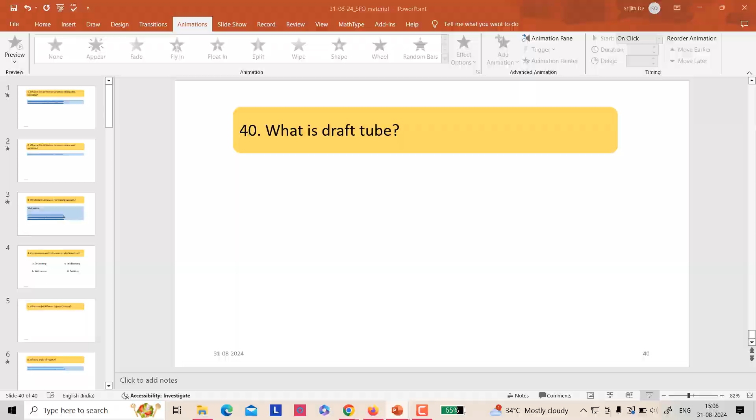So the first question is, what is the difference between mixing and blending? Mixing and blending are almost same. They are used interchangeably.

Mixing is a process that tends to result in randomization of dissimilar particles. It mixes different size of dissimilar particles.

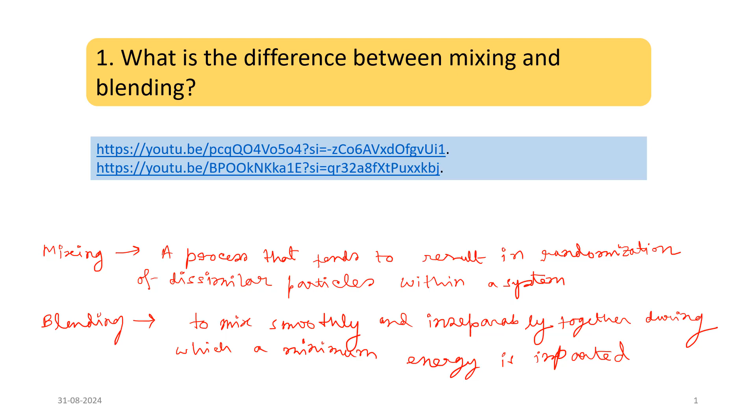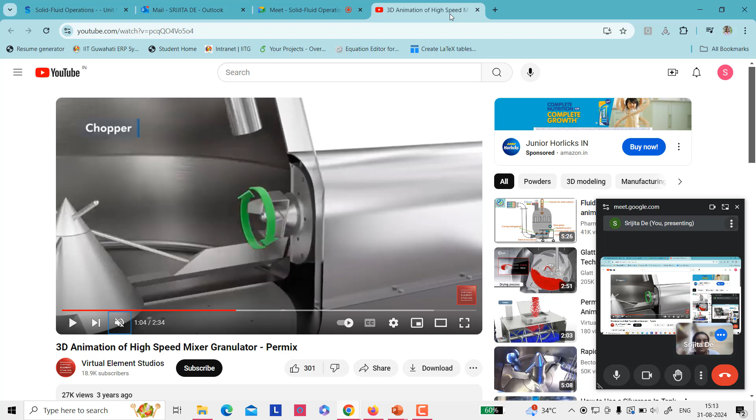I hope my screen is visible. So you can see here the solid feed - different types of two solids are fed, and they are mixed. This is also mixing or blending - this is a mixing between two solids.

Second, what is the difference between mixing and agitation? Now we have learned that mixing and blending are same, but mixing and agitation are not same. So what is agitation?

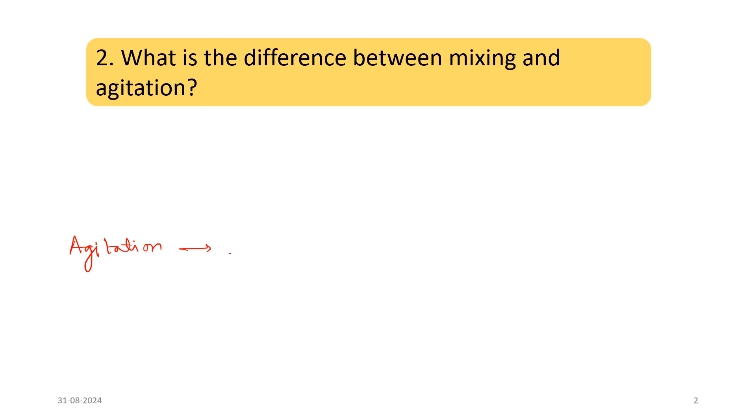It refers to the induced motion of a material in a specific pattern. So in case of agitation, particles or fluids are mixed in a specific pattern. But in case of mixing, it is rather a random distribution.

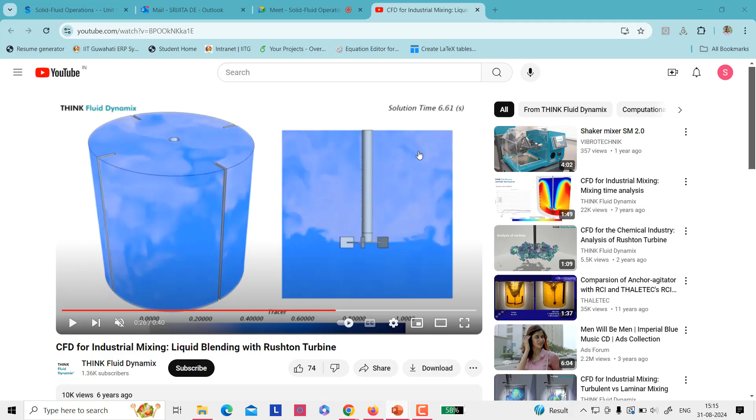So feed is given inside the chamber, and now you can see the induced motion is created through these blades of the stirrer. That is why some kind of external force is there to create the mixing - that is why it is called agitation. It is also one type of mixing. So different types of samples are coming and it is agitated.

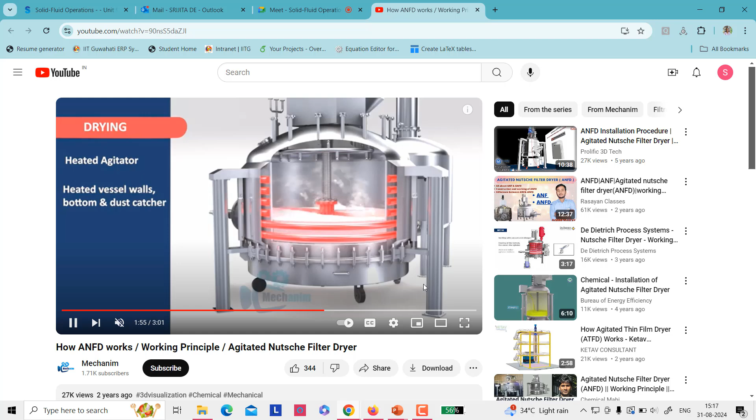So in drying also agitator can be used. In washing also agitator can be used. In cooling also you can see agitator can be used.

Now, which method is used for making capsules? Which mixing method is used to make capsules? The answer is wet mixing.

The answer is wet mixing. Wet mixing is generally considered in the granulation step in the production of tablets and capsules. So there are different types of mixing - one is wet mixing, second one is dry mixing, and third one is dry blending. All are almost same.

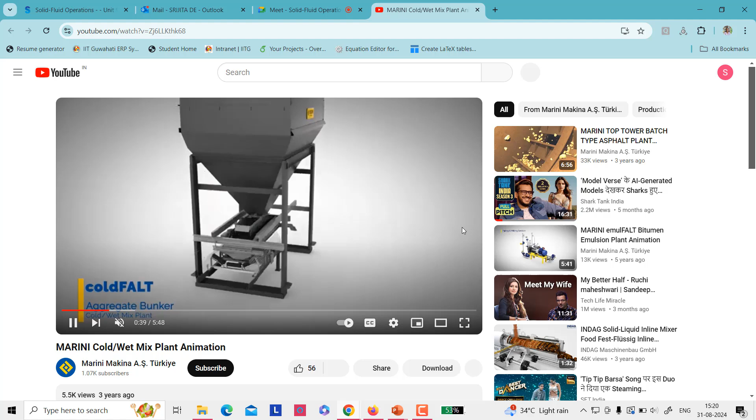So we'll see the videos. You can see the wet mixing plant.

These are the vibrators, removable bunker body extensions for transportation in container. So these are different parts - feeding bunker, from here feed will happen. This is how you see - these are the nozzles, spraying nozzles from where cold or wet water will be coming.

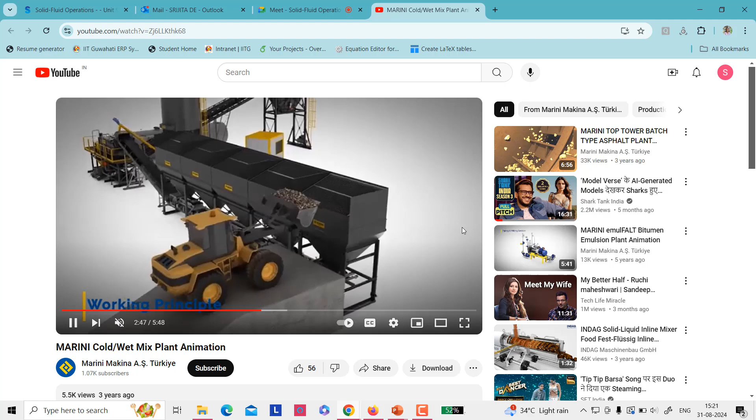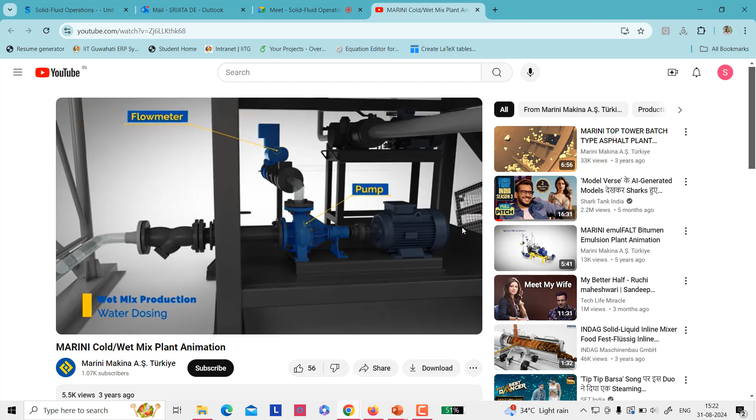Now see, different types of particles are going. Now water dosing will happen. There is a pump which controls the water pressure. Now see, water dosing is happening.

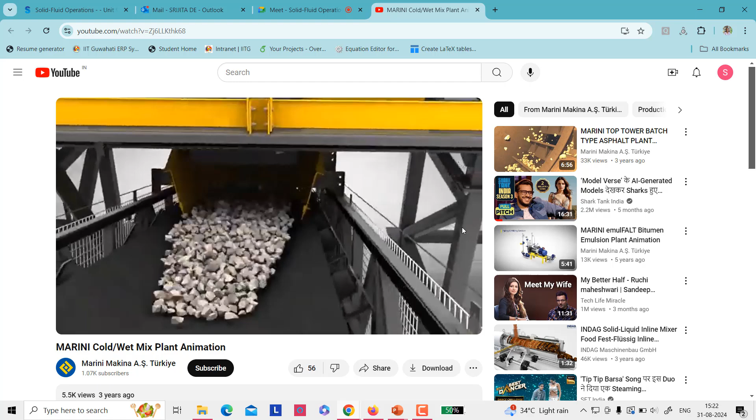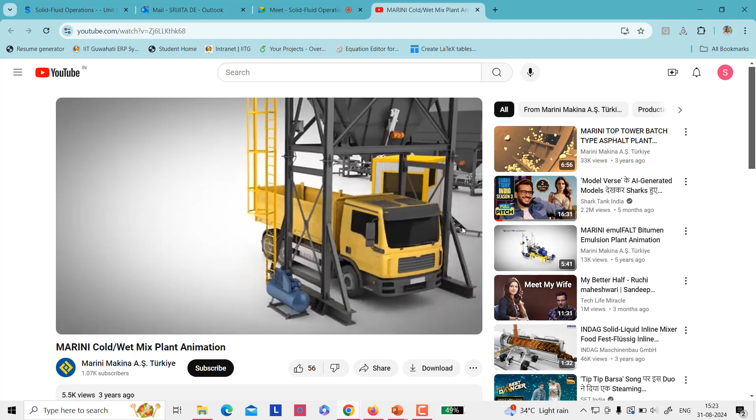Next one is the dry mixer.

This is the different parts of the system. This is the fine particles. Mixing is happening. So this is the dry particles are mixed.

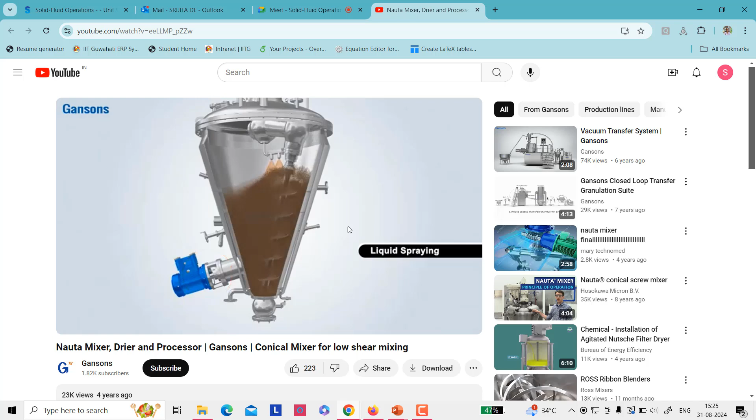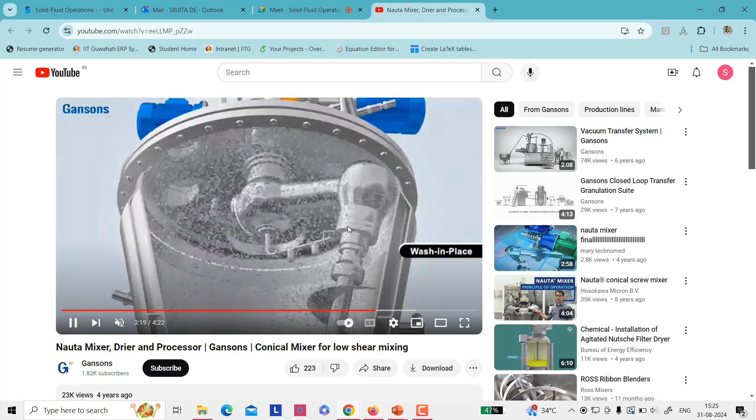Now heating is happening. Now from the bottom, discharge is there, right? So this is the dry mixer. Now we'll see the dry blender.

Next, compression method is used in which method? So the answer is dry mixing.

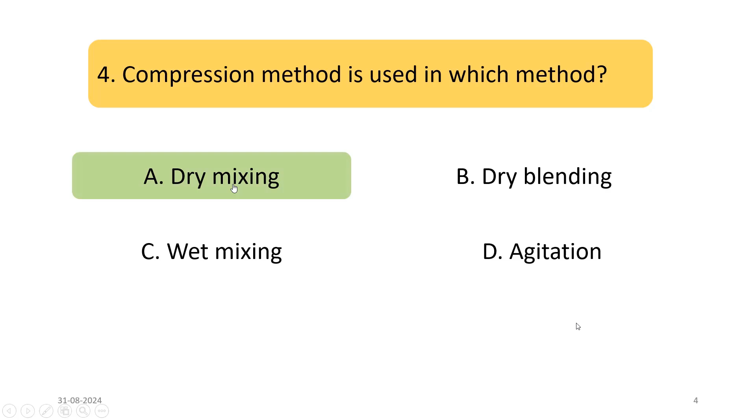What are the different types of mixing? First one is the convective mixing. Second one is the diffusion mixing. And the third one is the shear mixing.

Convective mixing means the groups of particles are moved from one position with a pattern, mixing two or more groups of solid particles so that they are dispersed in each other.

Diffusion mixing means the particles are distributed over a freshly developed interface. The powdered materials are mixed in a container where the movement of the powdered particles occurs by tilting the material beyond the angle of repose.

And shear mixing is the momentum exchange of powder particles having different velocities leads to shear mixing. So shear mixing is happening due to the shear stress or shear force. Diffusion mixing is more among the powdered materials, and convective mixing is for the larger particles.

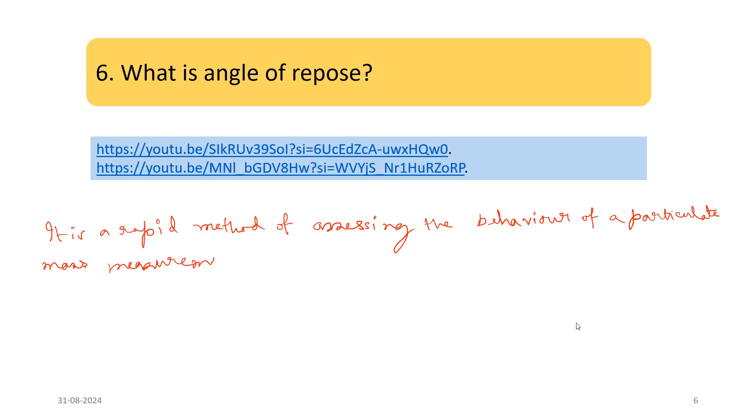Now, if solid is poured from a nozzle onto a plane surface, it will form an approximately conical heap, and the angle between the sloping side of the cone and the horizontal is the angle of repose.

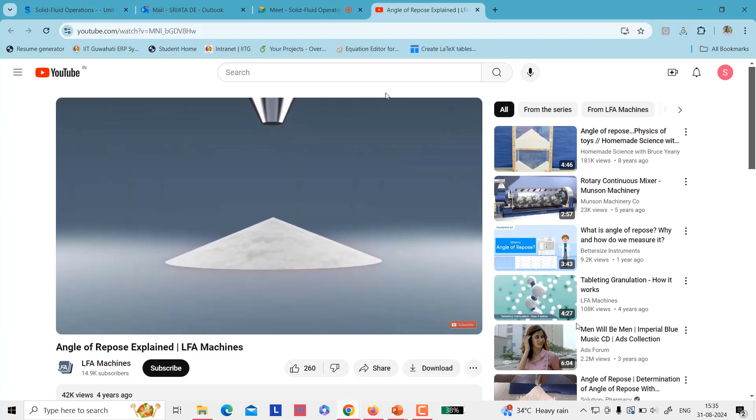Initially, when very less amount of powder is there, it is just 0°. And now we are increasing the amount, and now it is showing the 48° angle of repose. Now, if we again increase, it will increase the angle from 48 to 90. The previous one was irregular shape, this is the regular shape, and this is the different kind of heap they are creating with this tester.

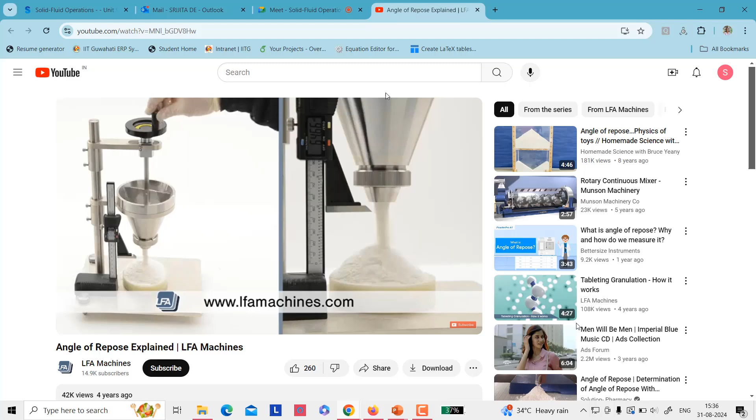So this is just showing the tester.

Next question. Gravity in bed mixing device is an example of active mixer. Is it true or false? Gravity in bed mixing device is an example of active mixer.

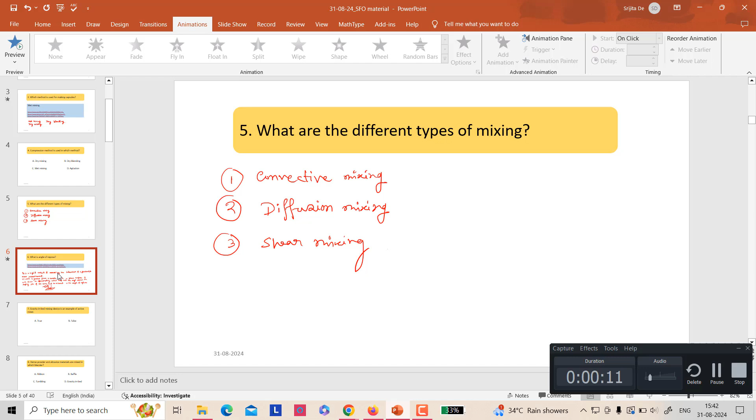Now, gravity in bed mixing - is it an example of active mixer or not? The answer is false. So gravity in bed is a passive mixer.

Passive mixer. So what is passive mixer? In this system, randomization of the materials is achieved by directed flow of the powder streams by baffles, etc.

And another mixer is active mixers. The active mixers use certain moving parts to assist in the randomization of the solid materials, or the mixer machine moves about physically in this mixing process. So in case of active mixing, the direct involvement of the material or direct involvement of the machine is required.

Next question. Dense powder and abrasive materials are mixed in which blender? The answer is tumbling type of blenders, where dense powder and abrasive materials are mixed.

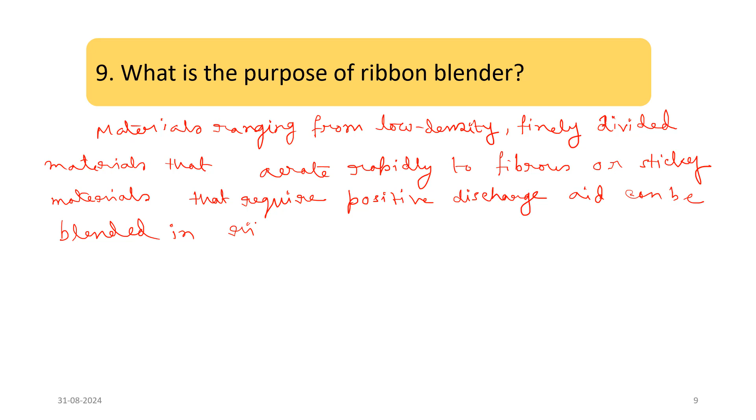Can be blended in ribbon blender. A broad ribbon can be used for lifting as well as for conveying, while a narrow one will cut through the material while conveying. So these are the purpose of using ribbon blender.

Next question. What is the name of the blender that uses a conical vessel and reduced power consumption?

What is the name of the blender that uses a conical vessel and reduced power consumption? The answer is vertical orbiting screw blender. It is a batch type blender consisting of a conical vessel with a rotating screw which lifts powder from the base of the vessel to the powder surface, while at the same time orbiting around the vessel. An advantage of this design is that mixing is rapid, and the power consumption to produce a uniform blend is considerably reduced.

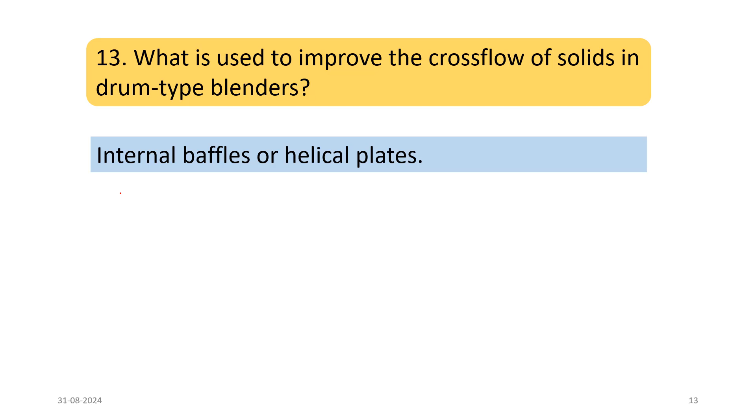Next question: talk about the different types of blenders. So till now we have learned there are so many blenders, right? Batch type blenders, continuous type blenders. So we'll see the videos one by one.

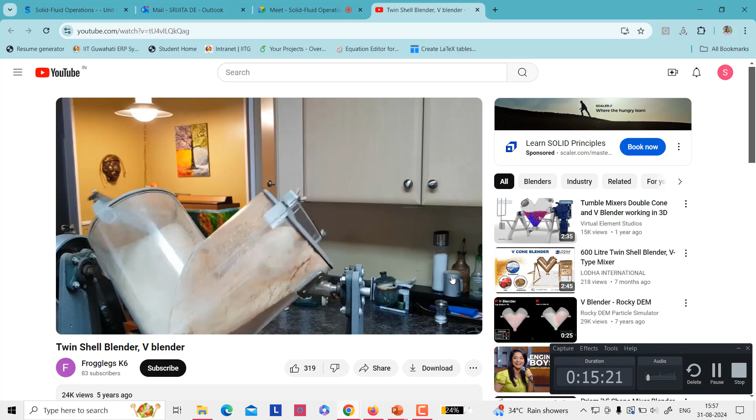First one is the twin shell blender, or V-type blender, also called the tumbling blender. You can see how they are mixing, right? So again, if you see this, this is the mixing type.

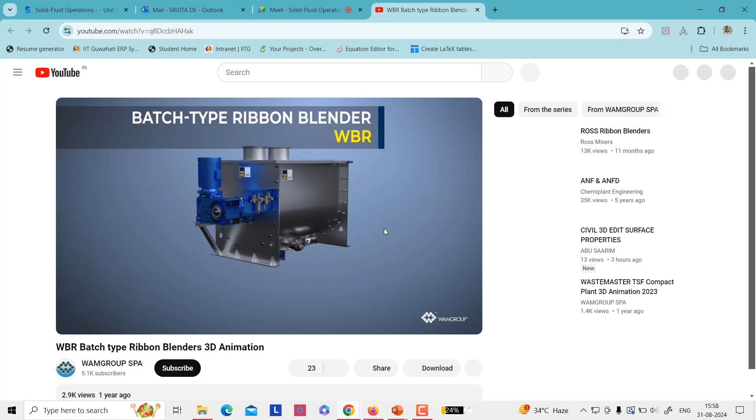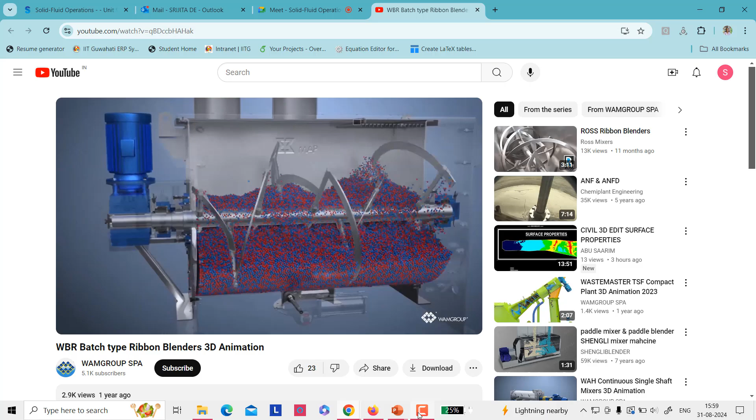So now we will see this is the ribbon blender. Two types of fluids, solid particles, are coming and they are mixed with this blend.

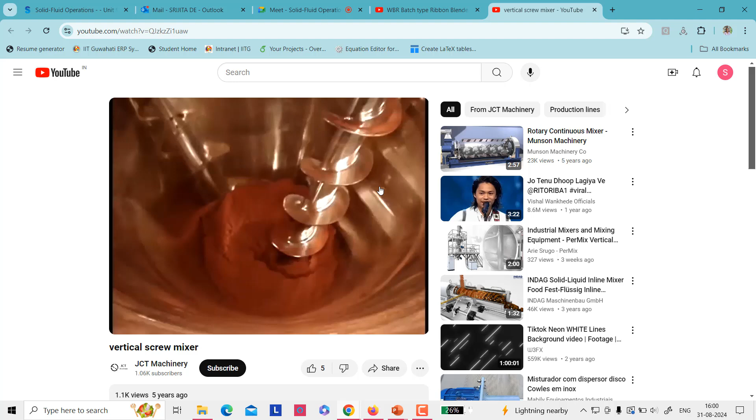Next is the vertical screw mixer. So this is a real example. You see that two screw type blenders are mixing in a vertical surface.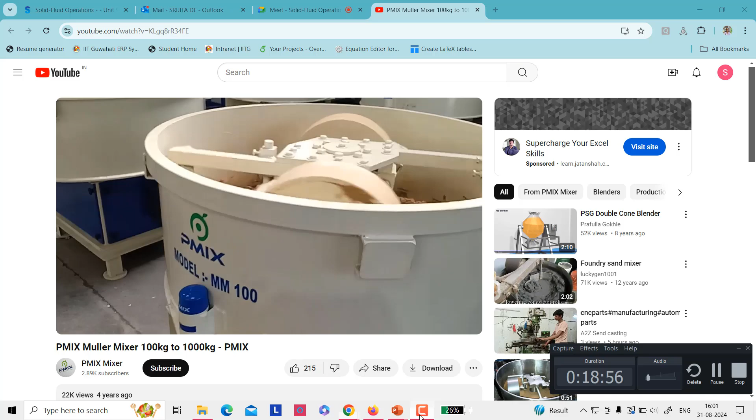Next is the Muller mixer, continuous Muller mixer. You can see, it is written that the wheels compress materials against the pan bottom while the scrapers move the material from the pan sides and center to flow under the wheels. This is the typical Muller mixer.

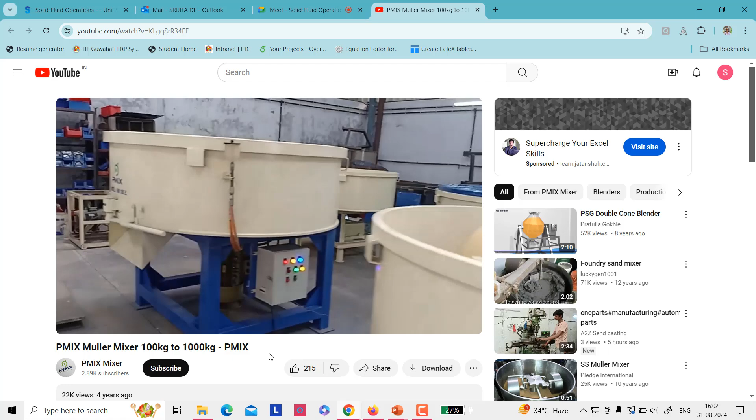So that is how they are separated. Next one is the single rotor blender, single shaft rotor blender.

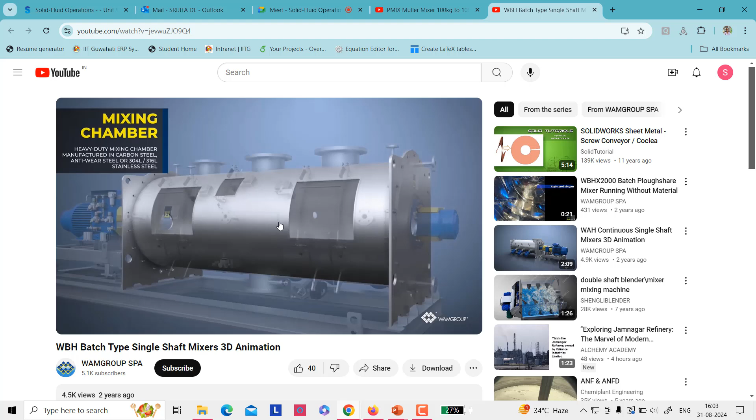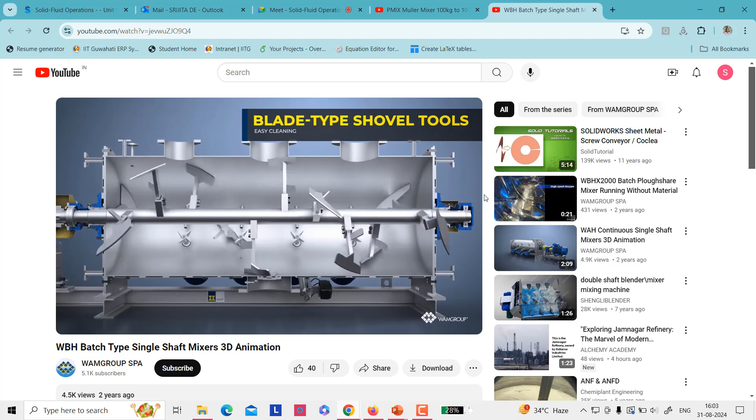They are mixing using different types of blades. You can see, right? Standard tooth edged blade type, tooth blade, shovel tools are used for mixing. So different types of blades are used. You can see how they are mixed - this is the single shaft rotor blender.

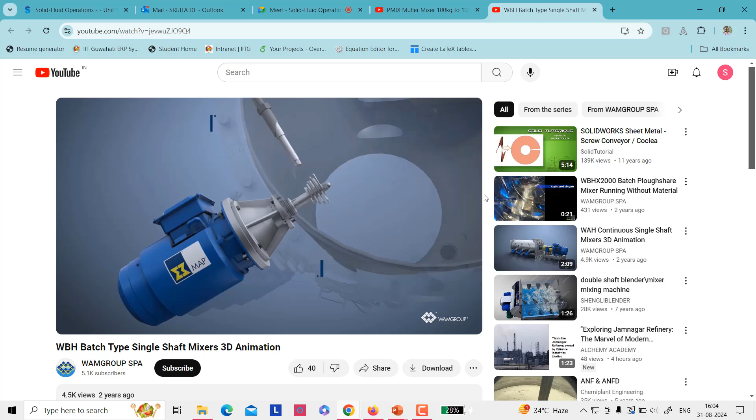Next one is the continuous mixer. Till now we have learnt about the batch mixer, now is the continuous mixer. You can see in the continuous process, feeds are coming, they are mixed, two different types of feeds are coming, they are mixed along the way and they are separated. This is continuous mixing.

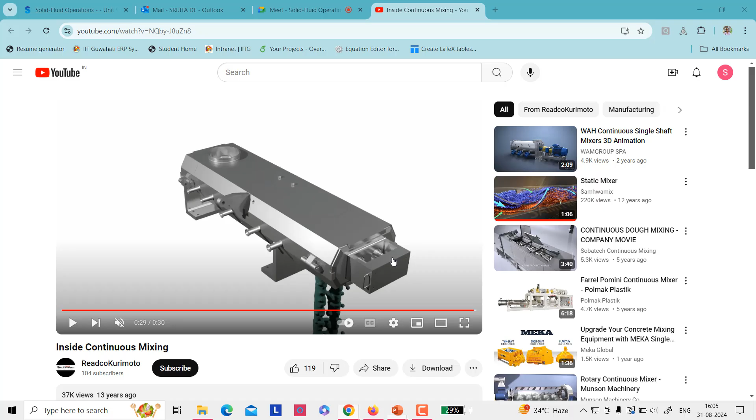Next one is about the pug mill. The pug mill consists of a drum or trough-shaped vessel equipped with a double-shafted or, less often, single-shafted agitator. The paddles are usually adjustable, you can see the paddles here, so that their forward and backward motion can be varied during mixing. So this is a pug mill.

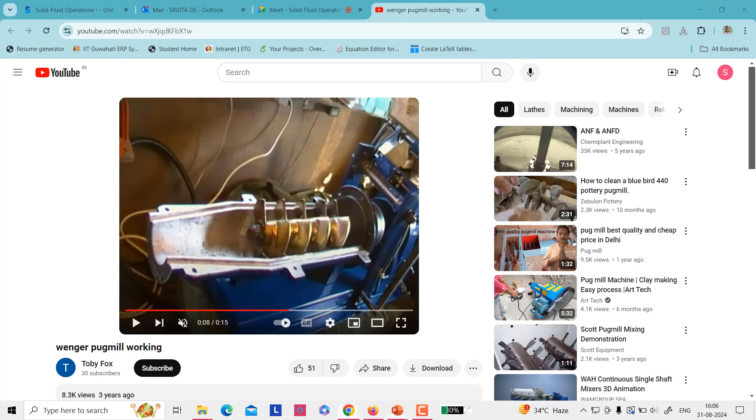Next is the static mixer. You can see that flow is coming, and without any movement, due to the baffle, the fluid is mixed. So static mixing is also called the motionless mixer, which consists of a cylindrical chamber containing a chaos inducing element. Here the chaos inducing element is this baffle, which helps in mixing of the liquids.

Next is the zigzag rotor. So this is the zigzag rotor.

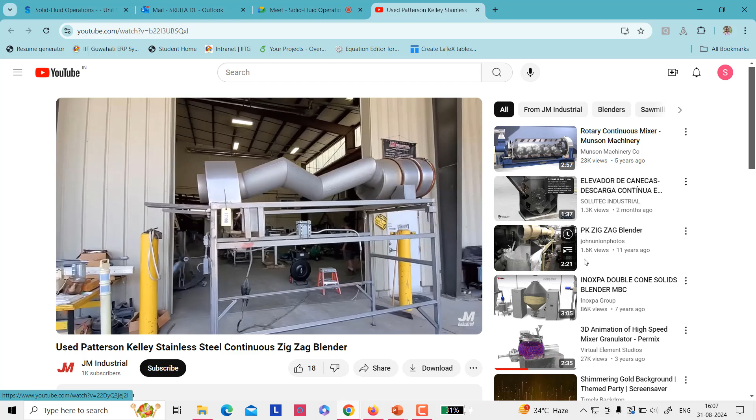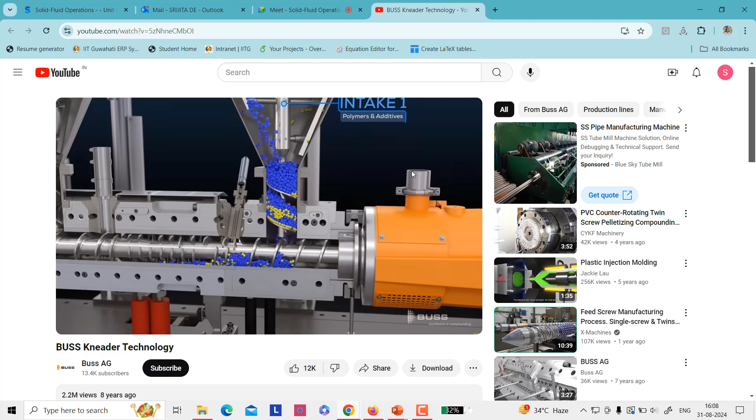Last one is the kneader. So this is the mechanic part. You can see how the shaft is also moving and having an oscillating motion, right?

This is the melting zone and particles are mixed. Some fillers are mixed here. So you can see how it is a continuous process. Along the way, everything is happening from the coming feed to mixing and processing, and finally the outlet.

So this is the kneader. This is the whole kneading technology or kneader technology.

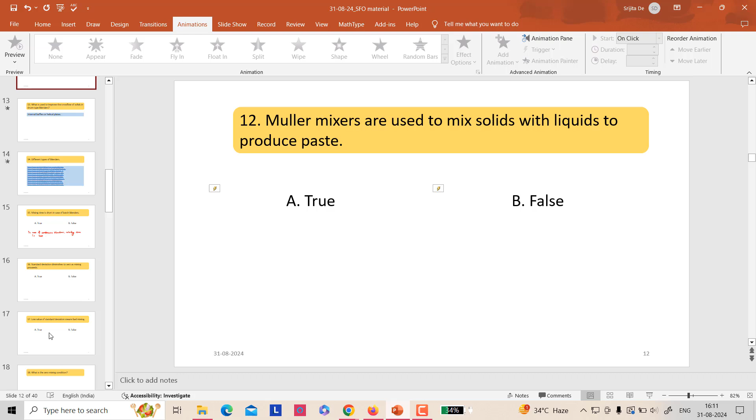Next, standard deviation diminishes to zero as mixing proceeds. Is it true or false? The expression of standard deviation, you know, right? S is root under summation of xi minus x bar whole square, where i is 1 to n, divided by n minus 1. So n is the total number of samples, xi is the volume fraction of each of the tracer, and x bar is the average volume percentage. Now the answer is true. As mixing proceeds, all kinds of particles are distributed in almost similar size or average size. All kinds of particles achieve almost an average size, so standard deviation becomes 0.

Next, low value of standard deviation means bad mixing. Is it true or false? It is false. Because, as we just saw, if the standard deviation value is diminishing, that means it has created an almost homogenized mixture. So low value of standard deviation means good mixing. That is why it is false. It will lead to good mixing.

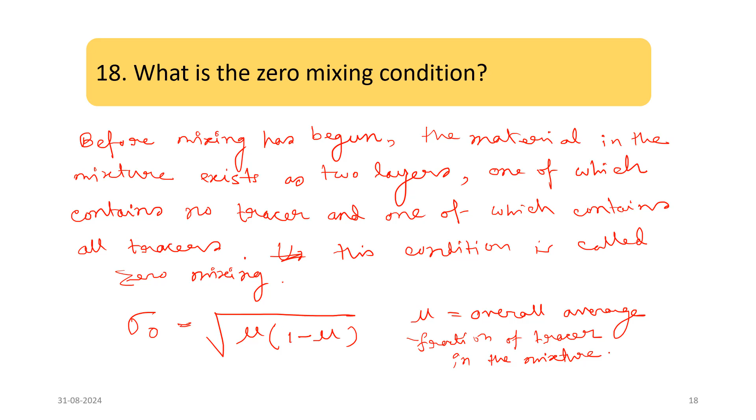Next, in batch mixing, what is the value of mixing index at the start? The answer is unity. Mixing index is unity in case of batch mixing at the initial condition.

Next, higher the value of mixing index, higher the value of what? Fill in the blanks. So what is mixing index? Mixing index is defined as Is equals sigma 0 by S. Now if we write the expression, it will be n minus 1, mu into 1 minus mu, divided by summation of xi minus x bar whole square, i equals 1 to n. So this is the mixing index, right? Mixing index is high means the mixing is also high. The quality of mixing is also high.

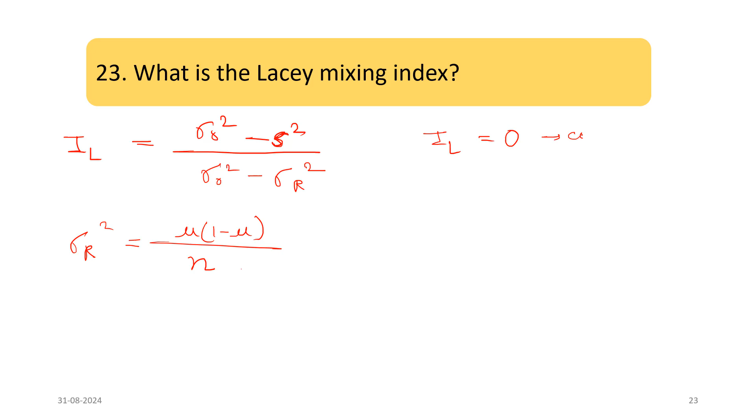Lacey mixing index, IL is 0, would represent complete segregation. That means particles are separated, not started mixing. And a value of unity, IL is 1, means completely random mixture. Practical values of Lacey mixing index lie between 0.75 to 1. This is the expression of Lacey mixing index.

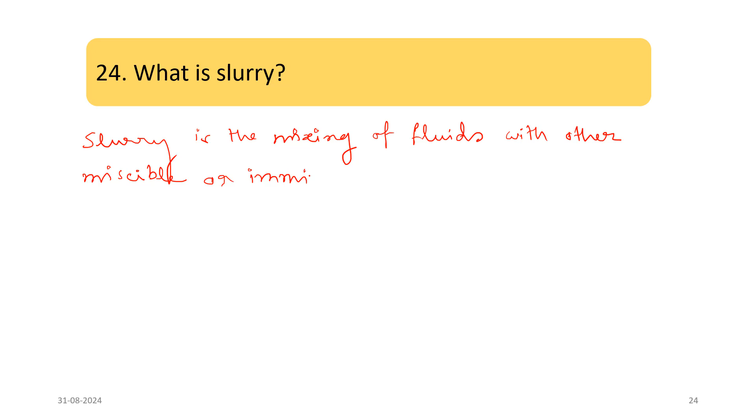Next, what is slurry? Slurry is the mixing of fluids with other miscible or immiscible liquids, gas, and with fine particles.

So this is the slurry. This is a mixture of all the things.

Next question: different methods of slurry mixing. Talk about the different methods of slurry mixing.

First one is the turbulent mixing. It is the highly effective mixing due to turbulent flow, which results in random fluctuation of the fluid velocity at any given point within the system. Fluid velocity at a given point changes in three directions, that is x, y, z.

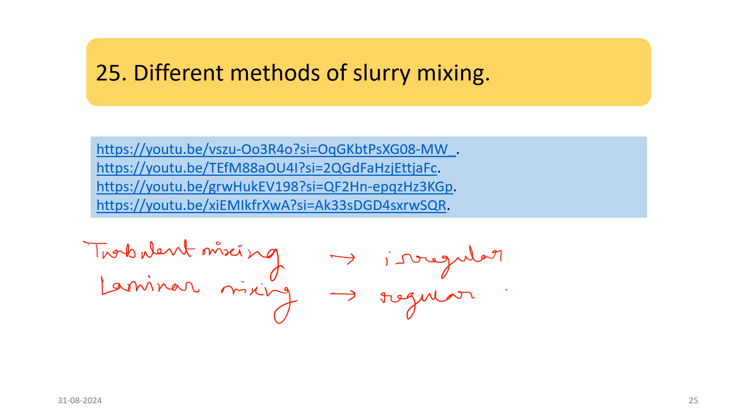Second one is the laminar mixing. So turbulent one is the irregular mixing, laminar one is the regular mixing. Here two dissimilar liquids through laminar flow, applied shear stretches the interface between them, suitable for liquids which require moderate mixing.

And the last one is the molecular diffusion. It is the mixing at the molecular level. So we'll see the videos and it will be much more clear.

So this is the turbulent mixing. You can see how vigorously it is mixing and it doesn't have any particular direction of mixing. It can mix in any direction, X, Y, Z direction. So that is called chaotic, vigorous, turbulent mixing, right?

Next one is this - the laminar mixing. So mixing is happening layer by layer due to the presence of shear stress. You see how smoothly this is mixing. There is no vigorous, irregular patterns.

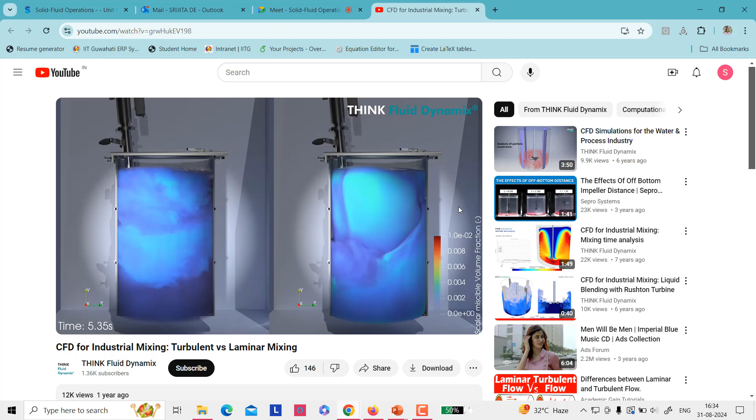Next one is the comparison between turbulent and laminar mixing. This is the turbulent regime, this is the laminar regime. You can clearly see the difference, how vigorously the turbulent one is mixing and how layer by layer with a particular pattern the laminar mixing is happening.

Next one is the molecular diffusion. It is happening at the molecular level in which molecules diffuse due to the thermal motion. So due to the thermal motion, it is creating this mixture at the molecular level, right?

Next question: in agitator, the fluid's depth is controlled approximately equal to the diameter of the vessel. Is it true or false? The answer is true. In agitator, the depth of the fluids and the diameter of the vessel is kept the same.

Next, what are the different types of impellers? The impellers are used to create flow patterns, right? So what are their types?

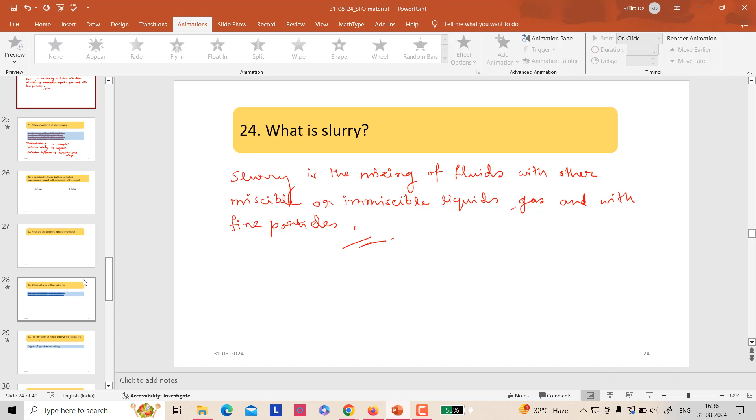So what are the different types of impellers? There are three types: propellers, turbines, and paddles.

Under this division there are also subdivisions like three blade turbine mixer, open straight blade turbine mixer, next bladed disc turbine - this is the most common of the turbines part - vertical curved blade turbine, and the last one is the pitched blade turbine.

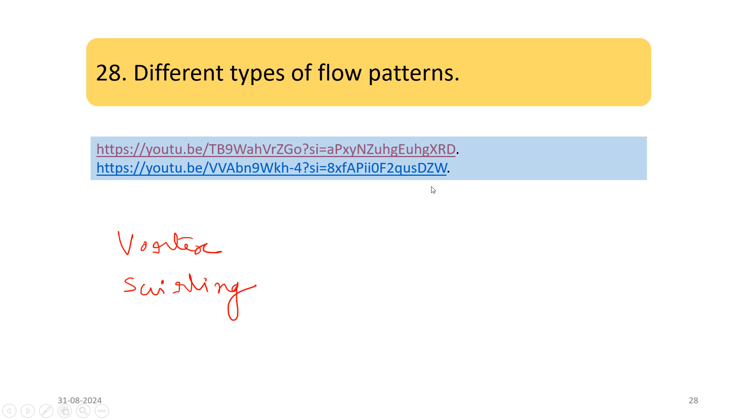So this is the swirling one. Swirling perpetuates stratification at the various levels without accomplishing longitudinal flow between levels. Swirling pattern develops if a low viscous fluid is stirred in an unbaffled vessel by a centrally mounted impeller. So this is swirling.

Next, the formation of vortex and swirling reduce the... fill in the blanks. The formation of vortex and swirling reduce the degree of agitation and mixing.

Next, in which type of fluid is propeller used? The viscosity of the liquid should be less than 50 poise. If the fluid viscosity is more than 50 poise, propellers cannot be used, like in case of castor oil or glycerol.

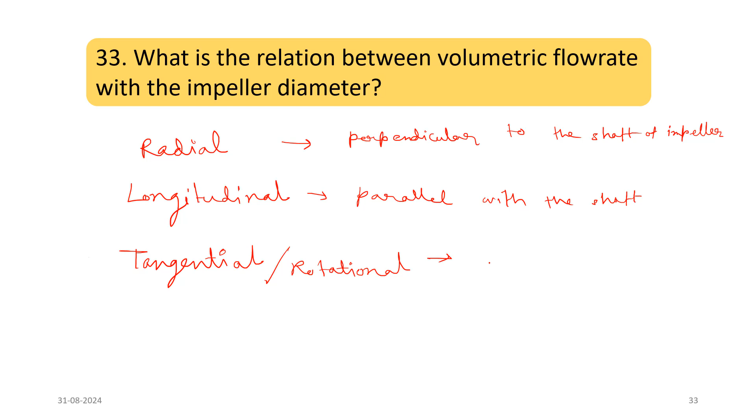So radial velocity component acts in the direction perpendicular to the shaft of the impeller. Longitudinal acts in the parallel direction, parallel with the shaft. And tangential or rotational acts in the direction of tangent to a circular path around the shaft.

Okay, next. So this is it, next.

What is the relation between volumetric flow rate with the impeller diameter? What is the relation between volumetric flow rate with the impeller diameter?

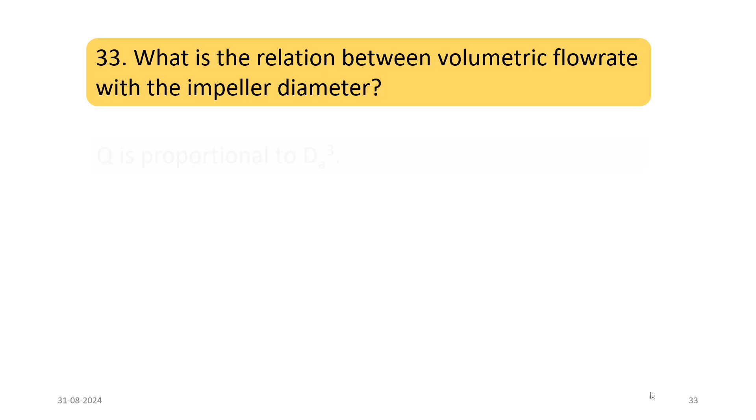So volumetric flow rate is proportional to the impeller diameter cube, right? So this is the expression. NQ is the flow number, N is the rotation of the impeller, and dA is the impeller diameter.

Next, flow number is constant for all type of impellers. Is it true or false? The answer is false - for different impellers, flow number is constant. No, I think flow number is constant for all type of impellers is true.

Yes, this is true, my mistake. So flow number is constant for all types of impellers - that is true. Next, what is the value of flow number in marine propellers?

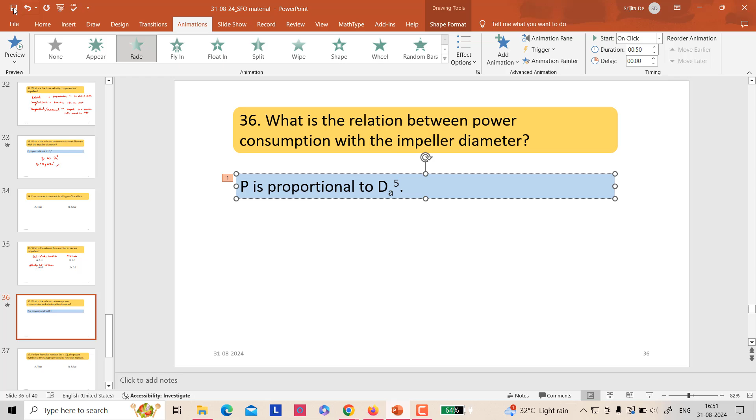Next, what is the relation between power consumption and impeller diameter? The answer is P - power consumption is proportional to diameter to the power 5. That is P equals NP rho N cube dA to the power 5, where NP is the power number, rho is the density of the fluid, N is the rotation speed, and dA is the impeller diameter. Next, for low Reynolds number,

the power number is inversely proportional to Reynolds number - is it true or false? For low Reynolds number, the power number is inversely proportional to Reynolds number, is it true or false? The answer is true.

For low Reynolds number, power number NP is inversely proportional to Reynolds number. Next, for higher Reynolds number, the power number is what? For higher Reynolds number, the power number is independent of Reynolds number, okay?

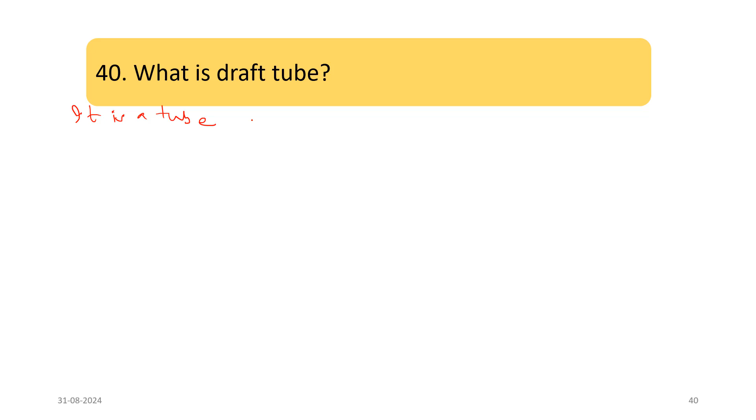Next, what is draft tube? It is a tube which is mounted around the impeller, or mounted immediately above the turbine. Okay, this is the draft tube.

So why is it used? When the direction and velocity of flow to the suction of the impeller are to be controlled, draft tubes are used.

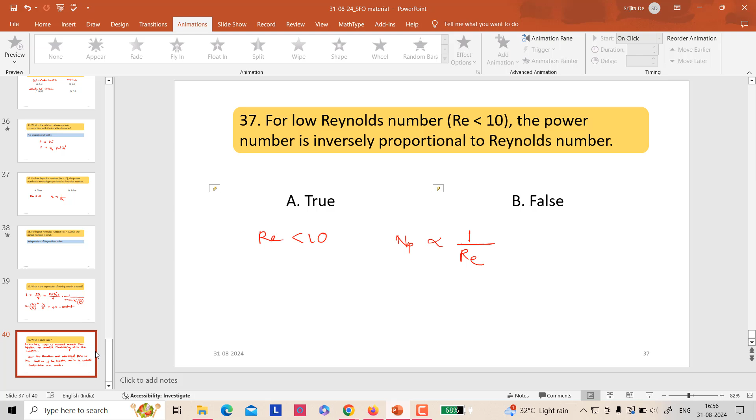Now I will do some numericals. Okay, let's start.

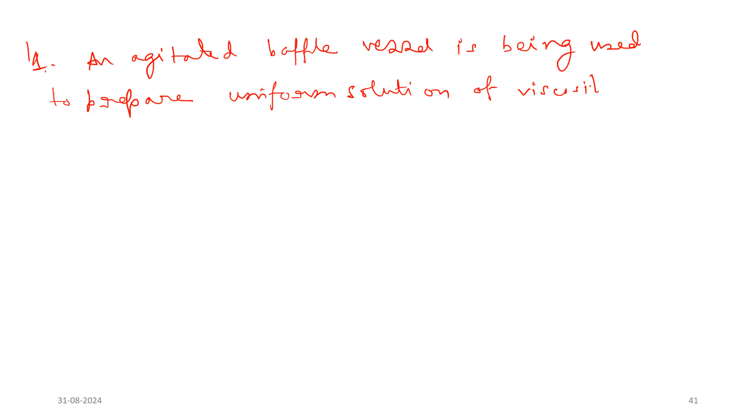First problem: an agitated baffle vessel is being used to prepare a uniform solution of viscosity 2 centipoise, running the agitator at 100 rpm so as to obtain a Reynolds number of 50,000. If the contents of the vessel are replaced by a solution of viscosity 4 centipoise and the agitator rpm is increased to 200, how much will the power requirement change?

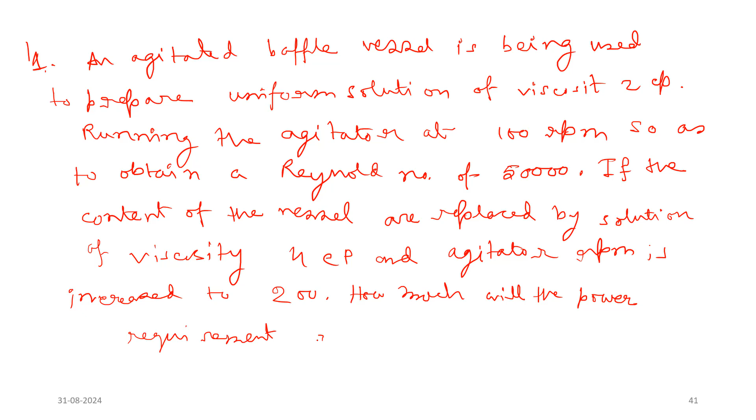RE is said to be 50,000, that means RE is greater than 10 to the power 4, that is turbulent flow. So in case of turbulent flow, power number is independent of the Reynolds number, right?

So power number, or power consumption, is proportional to - power consumption is Np rho N cube dA to the power 5. So P is proportional to rotational speed cube. So P1 by P2 equals N1 cube by N2 cube, right? So N1 cube is 100 cube and N2 is 200. So P2 will be, it is nothing but 1 by 2 cube, that is 1 by 8. So P2 will be 8 P1.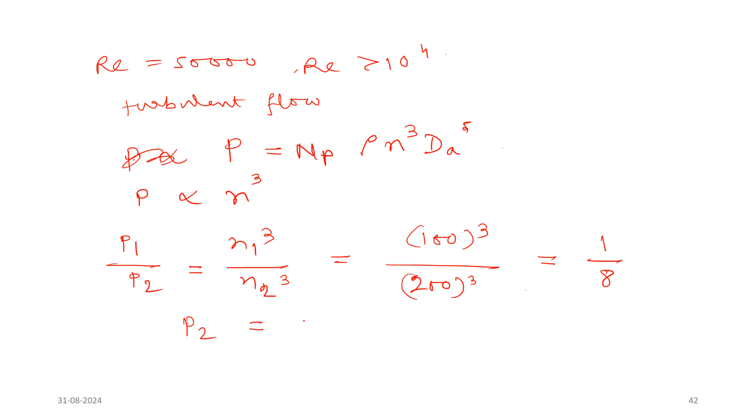So how much percentage change is there? Percentage change is, final power is 8 P1, initial power was P1, divided by P1 into 100%, that is 700% power requirement change. This is the answer, okay.

Next, we will do two more problems.

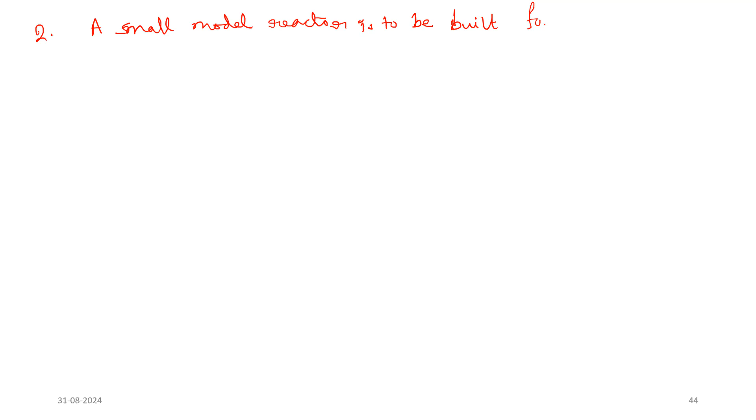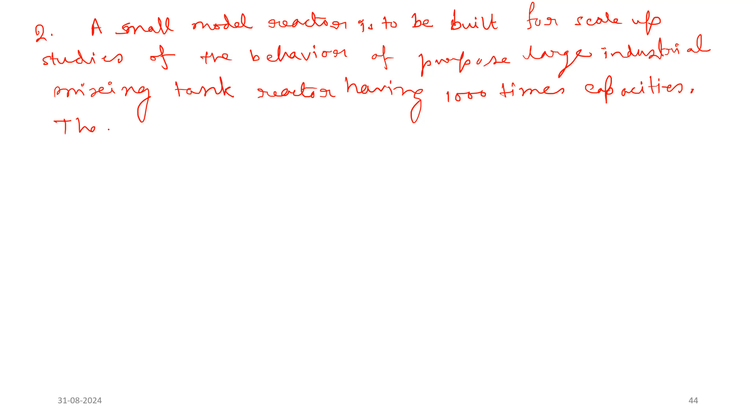Second problem: a small model reactor is to be built for scale-up studies of the behavior of a large industrial mixing tank reactor having 1000 times capacity. The bigger unit of 2-meter diameter will have a liquid depth of 2 meters. This will be fitted with a 4-bladed turbine of 0.6 meter diameter.

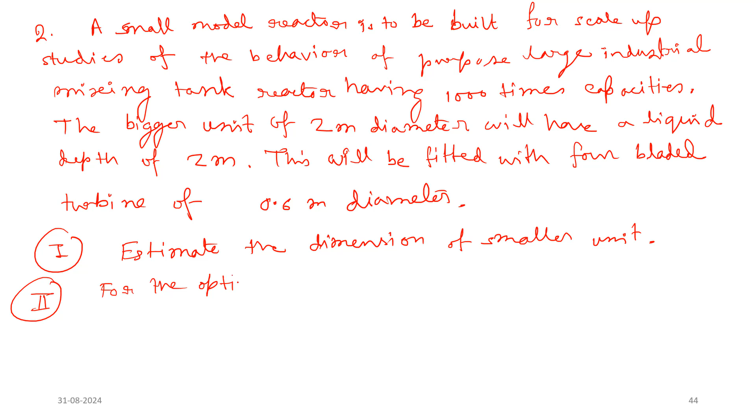Now the first problem: estimate the dimensions of the smaller unit. And the second: for the optimum mixing speed of 330 RPM observed in the smaller model, what will be the recommended speed in the industrial unit under the following conditions? So what are the conditions?

A is power per unit volume is kept constant. And the second one is Reynolds number does not change. Okay, so these are the answers.

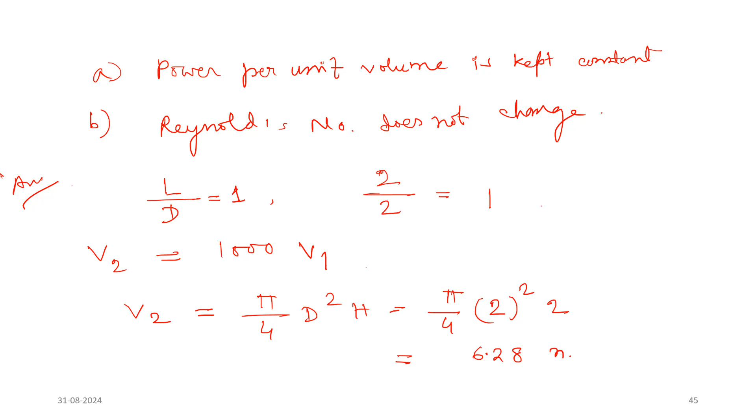So it is coming as 6.28 meter cube. Now smaller one will be V2 by 1000. So V1 is 6.28 into 10 to the power minus 3 meter cube. Now similarly we can calculate the smaller diameter. So pi by 4, smaller diameter and smaller tank height equals to 6.28 into 10 to the power minus 3.

So we already know that h by d is same, right? H and L here are the same thing. So here also L by D ratio is same. So it will be nothing but pi by 4 ds cube equals to 6.28 into 10 to the power minus 3. So from here we can calculate ds, the smaller diameter of the vessel. How much is it coming?

So it is coming at 0.2 meter. This is the smaller tank diameter, 0.2 meter.

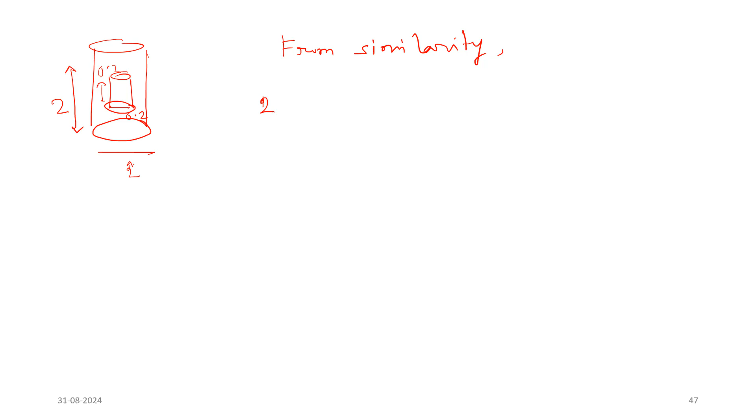Okay, now we need to know the impeller diameter or turbine diameter. How will you calculate? So this is the bigger vessel, this is the smaller vessel. So this is 2, this is also 2. And here this is 0.2, this is 0.2. So from similarity, we consider that the bigger vessel diameter 2 divided by smaller vessel diameter equals to bigger vessel turbine diameter divided by smaller vessel turbine diameter. So now from similarity, dt can be calculated to 0.06 meter.

Okay, this is the model, so first question is answered. Question 1 asked to estimate the dimension of the smaller unit. For question 2, it is asked to calculate the rotational speed for the following 2 cases. So the first case was power per unit volume is constant. This is the case. So in case of turbulent flow, we know that

P, power consumption, is power number times rho n cube dA to the power 5. So power per volume is Np rho n cube dA to the power 5 divided by V, where V is the volume of the tank. So it is Np rho n cube dA to the power 5 divided by pi by 4 dA square into L, or you can write P by V equals to Np rho n cube dA to the power 5 divided by pi by 4 dA cube, because in this case dA equals to L.

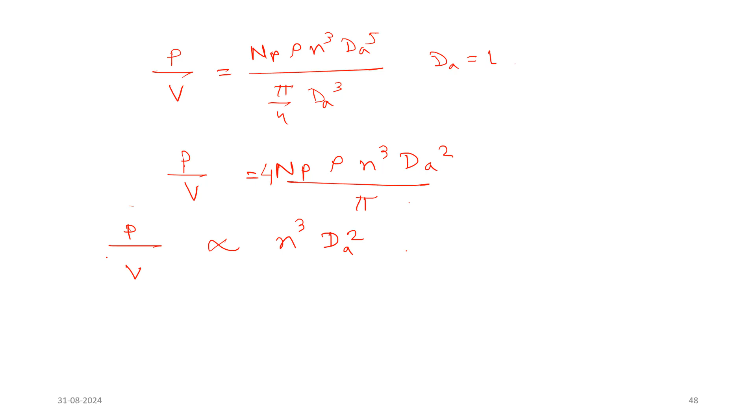So what is coming? It is coming as P by V equals to 4 Np rho n cube dA square divided by pi. So P by V is proportional to n cube dA square. So this is constant, that means n1 cube dA1 square equals to n2 cube dA2 square.

So suppose n1 is the bigger tank, so this needs to be calculated. So n1 cube, its turbine diameter is 0.6 square equals to N2, 330 cube into 0.06 whole square. So what is N1? This is coming as 71.09 RPM. This is the answer for case 1.

Now for case 2, it is asked that the Reynolds number is constant. So what is the expression for Reynolds number?

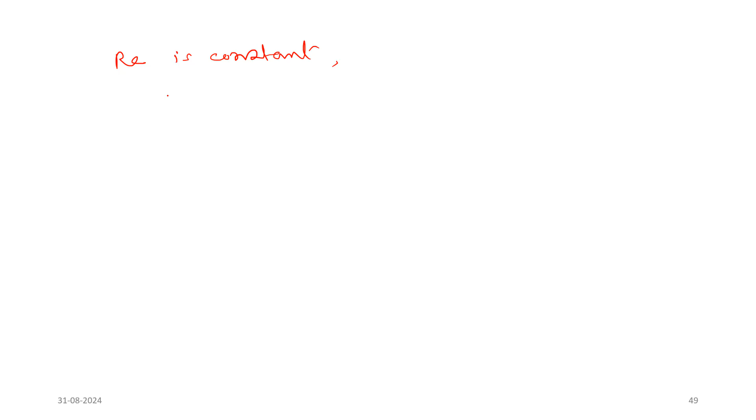N dA square rho by mu. So for both cases it is constant, meaning N1 dA1 square rho by mu equals N2 dA2 square rho by mu. So rho by mu is same for the fluid because same fluids are used. So N1 dA square, dA is again 0.6 square, N2 is 330 into 0.06 whole square. So N1 is coming as

3.3 RPM. This is the rotational speed for both the cases.

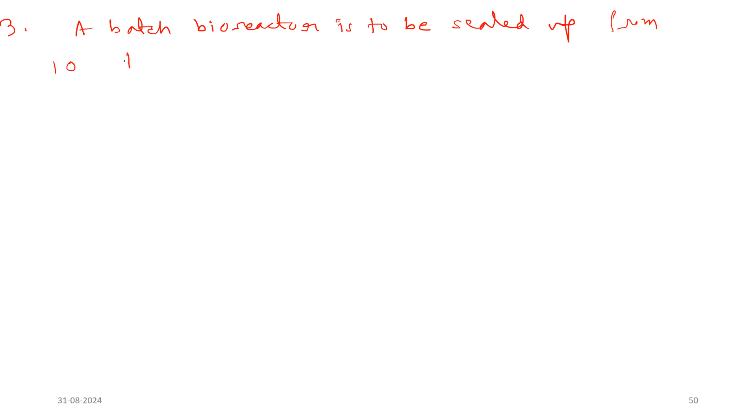Next question, this is a very simple question. A batch bioreactor is to be scaled up from 10 to 10,000 liters.

The diameter of the large bioreactor is 10 times that of the small bioreactor. The agitator speed in the small bioreactor is 450 RPM.

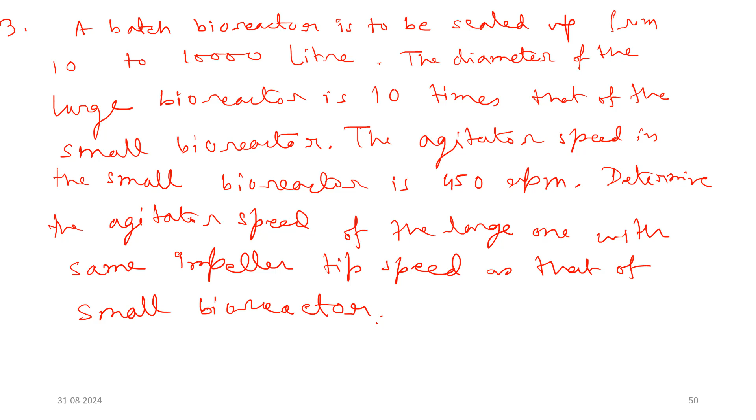Determine the agitator speed of the large one with same impeller tip speed as that of the small bioreactor. So for same impeller tip speed means NDA equals to constant.

Okay, so N1 DA1 equals to N2 into DA2. N1 is the large one, so DA1 diameter is 10 times of the smaller one, and N2 is given as 450 RPM and diameter is DA2. So N1, the large one's rotational speed, will be 450 by DA2, DA2 will be cancelled out into 1 by 10, which is nothing but 45 RPM. So this is the answer.